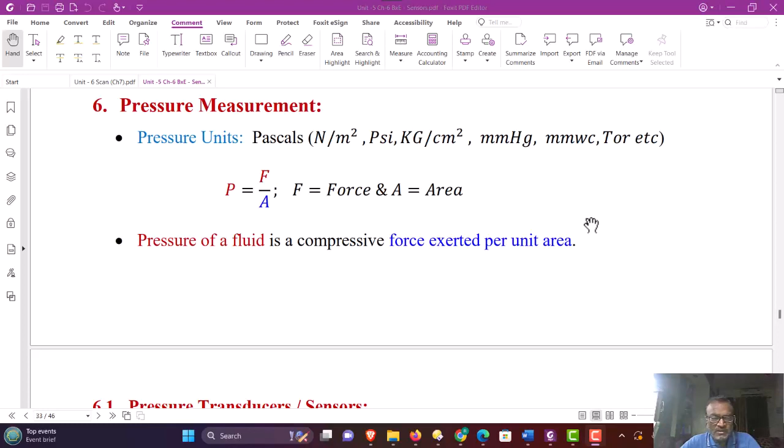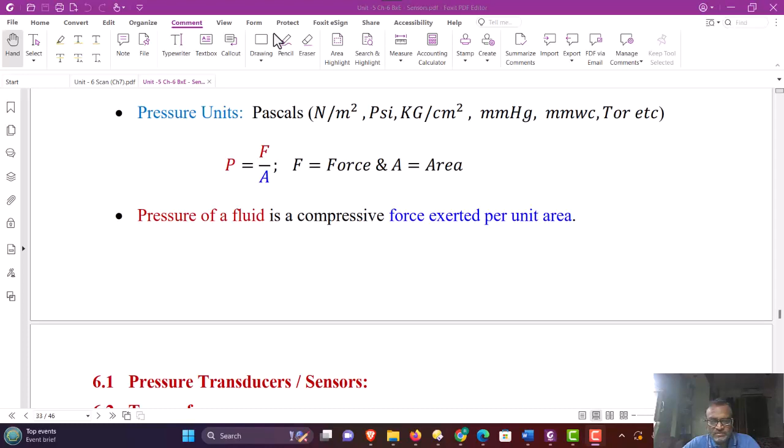This principle is used for measurement of pressure. Force is converted to pressure by applying it to a specific area, and force by area is giving you the pressure. Pressure of a fluid is basically a compressive force that is exerted per unit area.

The various pressure transducers used for measurement of pressure are listed here. Two basic types are used: gravitational pressure sensors, which measure the pressure against gravity.

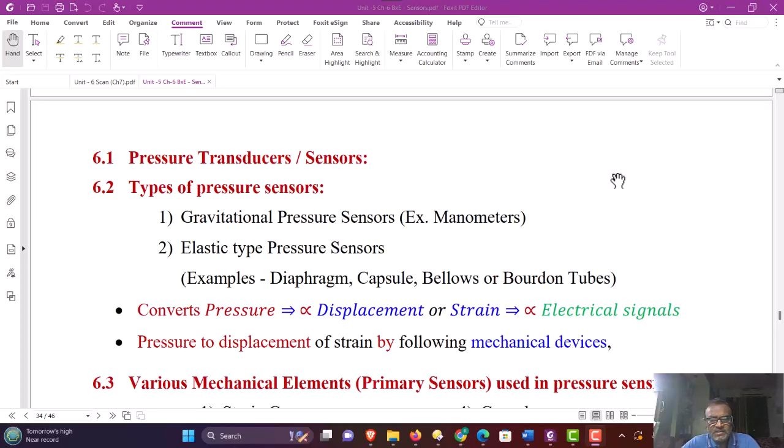Mostly the manometer comes in this range. Various types of manometers are there - water manometers, mercury manometers are very common. The fluid selected will be depending on the particular area of the application. But mercury manometers are very common and they measure the pressure directly in terms of mm of Hg.

The elastic type of pressure sensors mostly use elastic diaphragms, elastic capsules, bellows or Bourdon tubes. We will shortly see these mechanical devices and how they measure the pressure.

Basically, diaphragms, mechanical capsules, bellows and Bourdon tubes are the mechanical transduction devices. These are basically primary transduction devices. These devices transform the pressure into displacement, and displacement will be then converted to electrical signal by a secondary transducer. Many a time this can be done by using strain gauges or capacitive type of transducers.

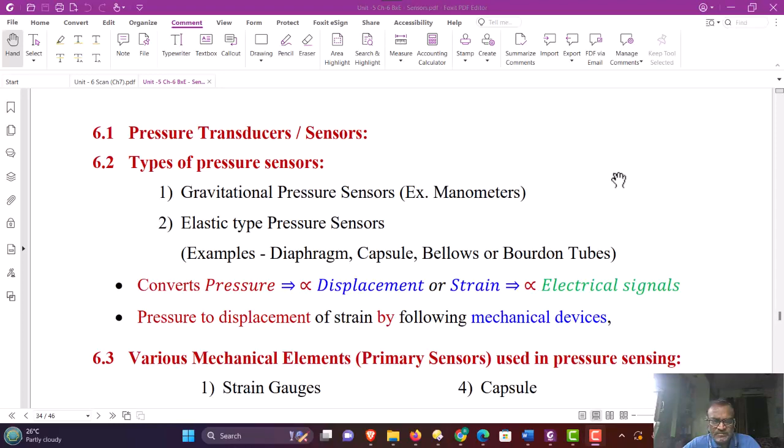The pressure to displacement conversion is done by these mechanical devices, and the displacement can be measured by using strain gauges very commonly. The strain gauges convert this mechanical strain to proportional resistance.

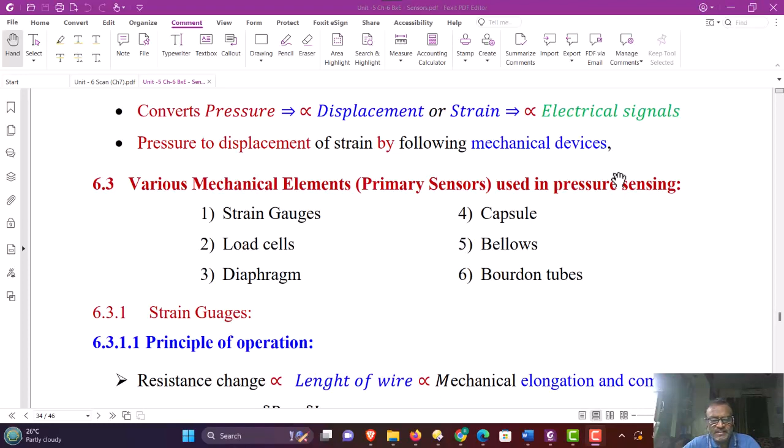Various types of mechanical elements, the primary sensors used in pressure sensing, are listed below: strain gauges, load cells, diaphragms, capsules, bellows and Bourdon tubes are quite common.

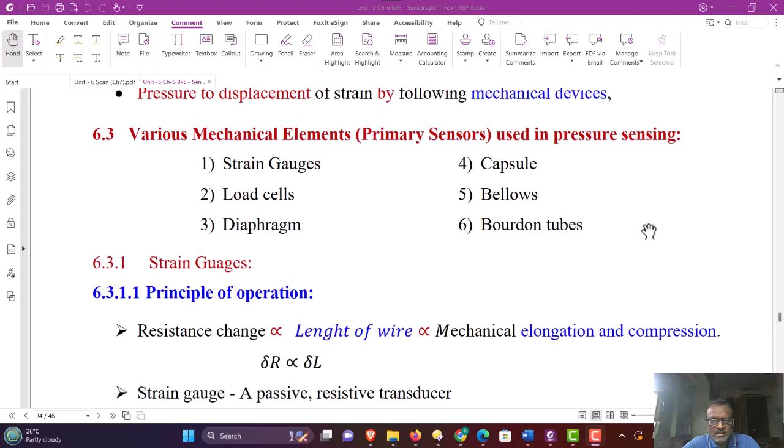Let us see what is strain gauge. The principle of operation of the strain gauge is when a strain is applied to a strain gauge, it changes the length. Strain gauge is basically a metallic wire.

When the strain is applied to the metallic wire, it elongates. When it elongates, the resistance of the wire will be changed. The change in resistance is proportional to the elongation.

This change in resistance is a passive quantity that will be further converted to electrical signal by using the Wheatstone Bridge type of circuits. Therefore, strain gauges convert the strain or mechanical displacement which creates the strain into proportional electrical signal. So we can conclude that change in resistance is proportional to change in length, that is shown here: Delta R is proportional to Delta L.

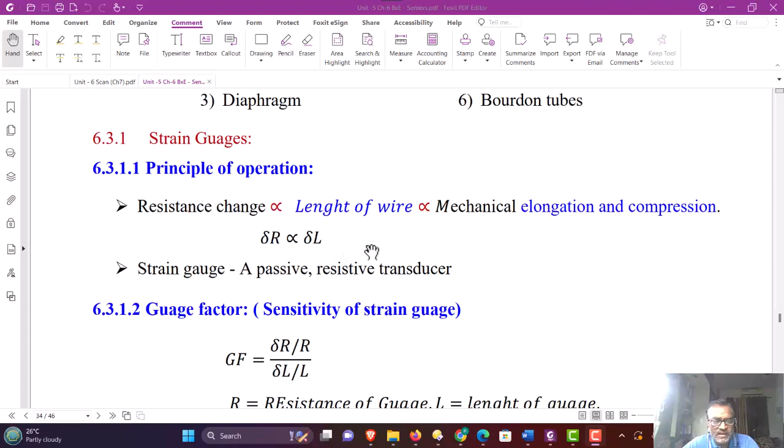Let us define some factor. It's called the gauge factor of the strain gauge. It is also called the sensitivity of the strain gauge, and it is defined as gauge factor GF is equal to Delta R by R upon Delta L by L, where R is the resistance of the gauge and L is the length of the gauge.

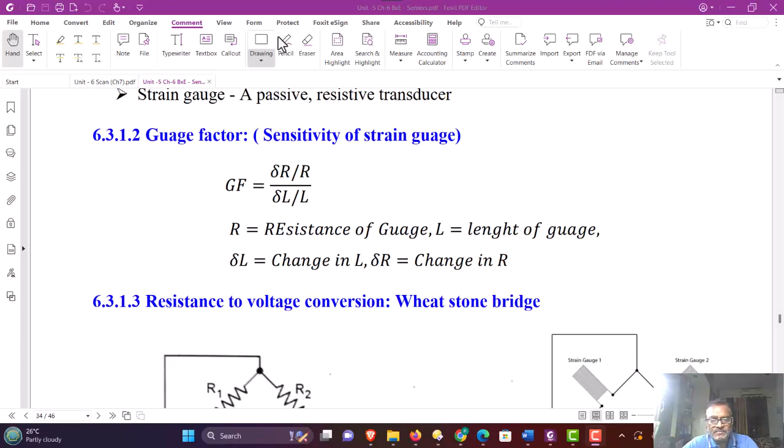Delta L is a change in length of the gauge due to applied strain, and Delta R is a corresponding change in resistance. Now, once the mechanical displacement or strain will be converted to resistance, then we can convert this change in resistance to the proportional voltage, and that can be done by using Wheatstone bridge.

The circuit shown here comprises four resistances. Out of that, one arm is constituted by a strain gauge. So R1, R2, R3 are the general resistances, and R4 is a strain gauge, and it is connected in a Wheatstone bridge form.

VDC is a biasing DC power source, and the detected output from the Wheatstone bridge is connected to the amplifier. The amplifier just provides the additional gain and high input impedance to avoid the loading of the sensing bridge. The output voltage of the amplifier is then proportional to change in resistance.

We will shortly see the analysis and calculate the output voltage. Here in the first figure, only a single strain gauge is shown, and that replaces arm 4. Whereas for higher sensitivity,

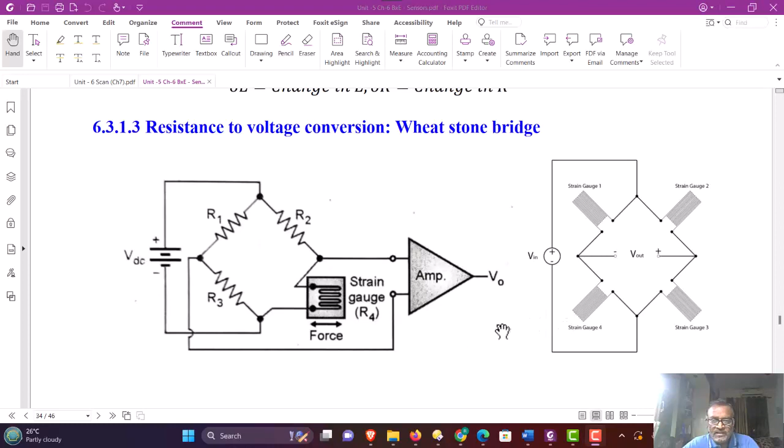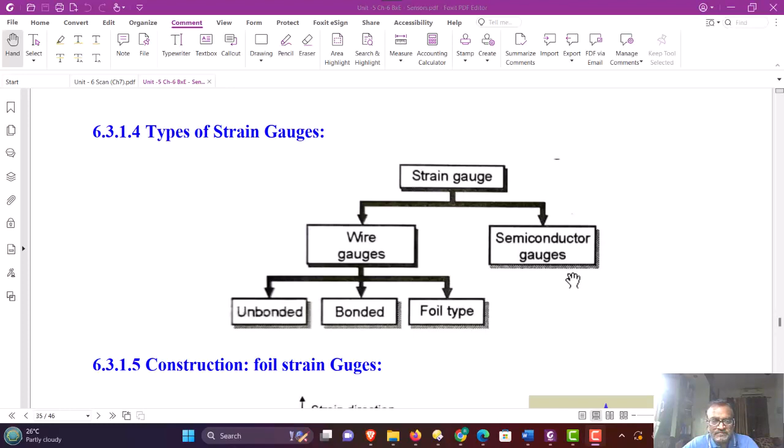The wire strain gauges are classified as unbonded, bonded, or foil type strain gauges. A typical construction of a foil strain gauge is shown in the figure. There is a base former, a flexible material, on which a very thin sheet of metal wire is printed either by screen printing or sputtering methods. This metallic zigzag wire structure is printed and shown here.

Here the gauge length is shown in the figure, and the direction of applied strain is also shown.

Whenever this gauge is applied with external strain or force, which will pull these wires, when these wires are pulled, their length will increase. When length increases, the diameter of the wire will reduce. And as we know, if the diameter of the metallic wire is reduced, the resistance of the wire will increase. Therefore, elongation of the strain gauge wire increases the resistance by an amount delta R, which is proportional to the applied strain.

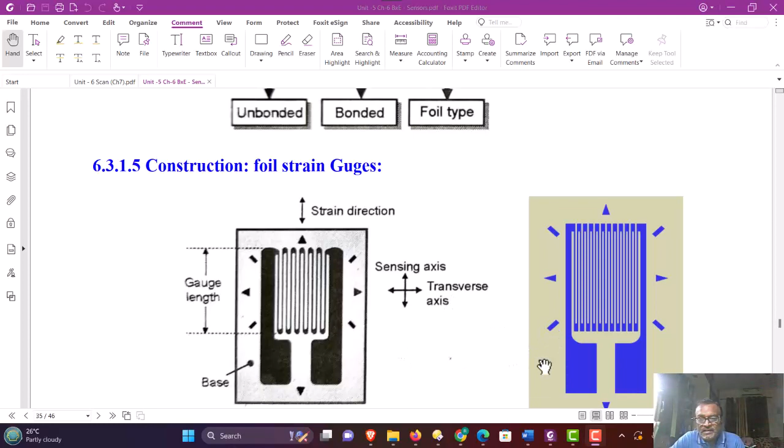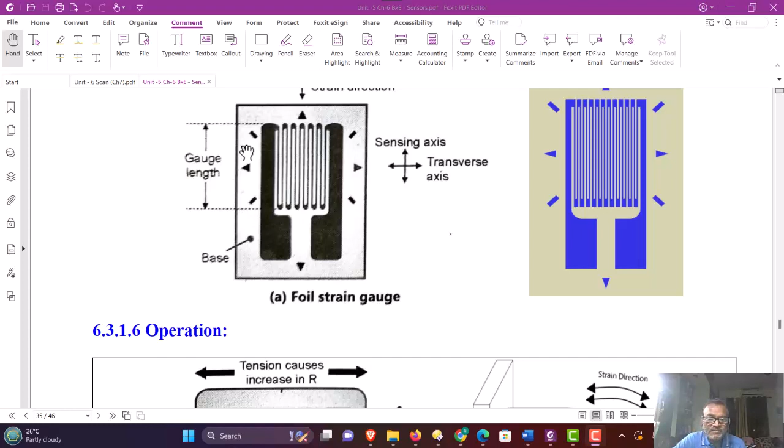The similar figure is repeated here in color form. Since these wires are very thin and printed on a flexible base, they are in the form of a foil, and therefore it is called a foil strain gauge.

Operation of the strain gauge, as I just explained, is shown again in this figure. The strain gauge is shown here horizontal. In the x direction, if we apply tension to this strain gauge, the wires get elongated and therefore there is a change in resistance. Whereas in the vertical direction, the gauge is insensitive to externally applied strain.

The external strain or force applied can be in the form of tension or compression. When it is a tensile force, the wire length increases and resistance increases. If it is a compressive force, the wire length reduces and therefore resistance decreases.

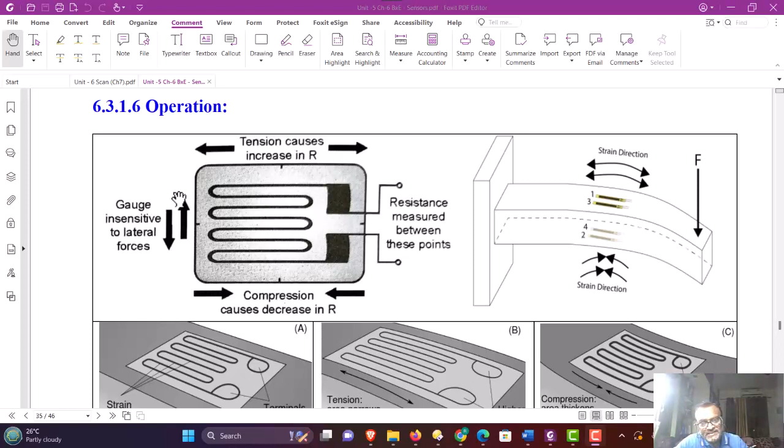This is shown here, how this strain gauge is mounted. It consists of a rigid support and a mechanical beam-like structure, and the strain gauges are mounted on the surface of this beam, say 1 and 3, and 2 and 4. There are 4 strain gauges mounted. You can have a single strain gauge, 2 strain gauges, or 4 strain gauges.

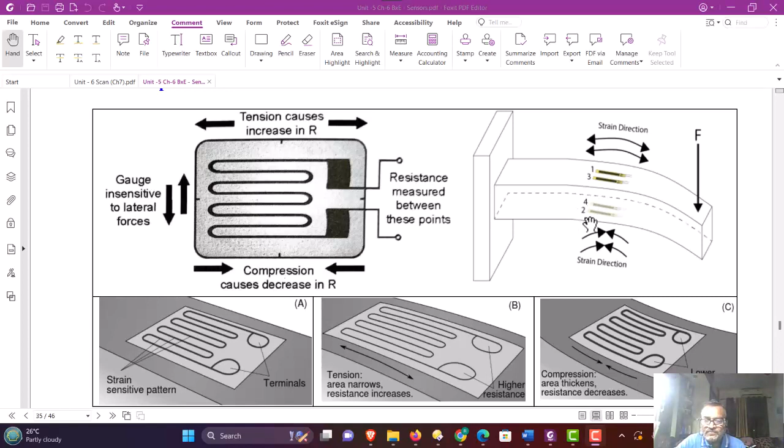Whenever force is applied to this cantilever beam, which is flexible enough, due to this pressure, stress is developed in these strain gauges. The upper strain gauges 1 and 3 gauge the tensile stress, whereas strain gauges 2 and 4 gauge the compressive stress. So the resistance of 1 and 3 proportionately increases with the pressure, and the resistance of 2 and 4 proportionately decreases with the applied pressure.

The same is shown in the figure below. The normal foil strain gauge is shown with terminal connections, and there is no deformation in the first figure A. When the foil is slightly bent, tension is created in the wires of the foil strain gauge and the resistance changes. In figure C, a compressive type of strain is developed due to bending of the strain gauge to the inner side.

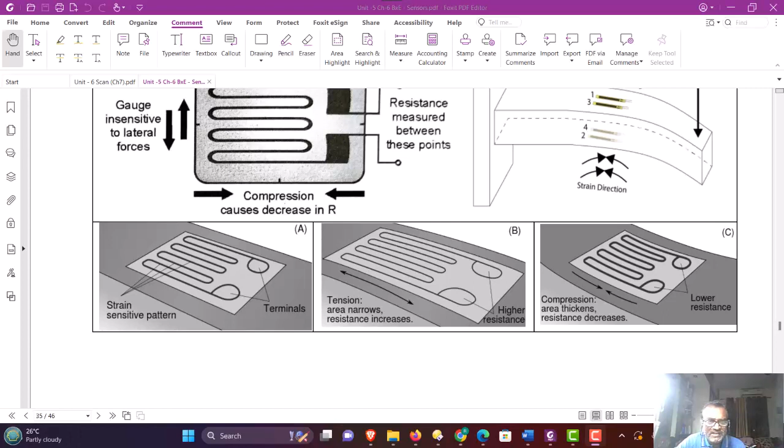The same happens here on the cantilever beam. Additional figures are shown for better understanding.

So now we get from the strain gauge: the pressure is converted to a proportional change in resistance. If these strain gauges are connected in bridge form in the appropriate branch, then the bridge output is proportional to the change in resistance.

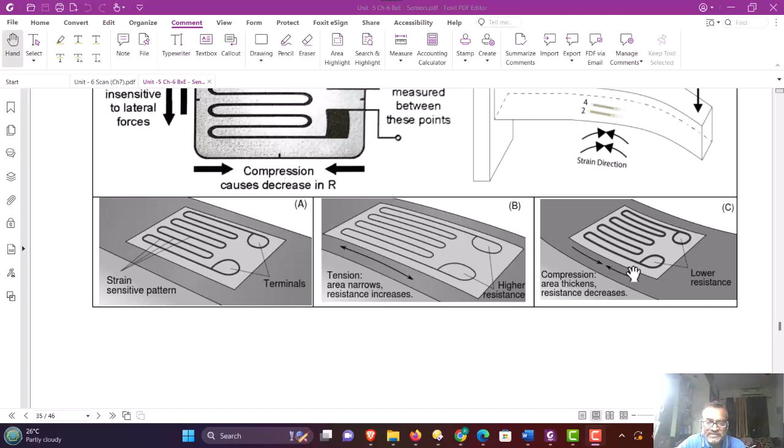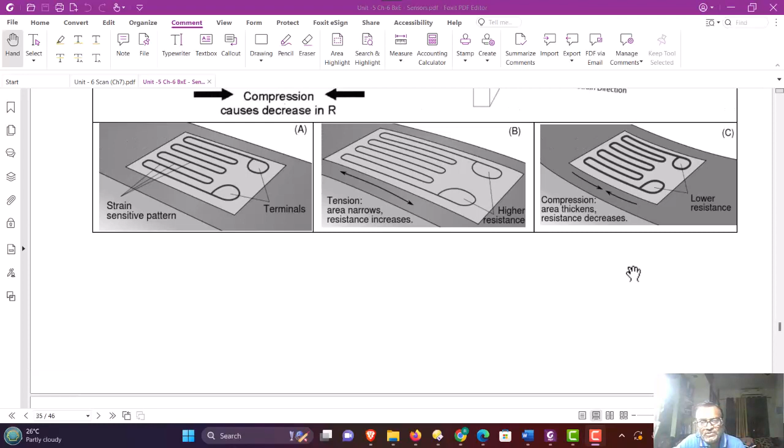If four strain gauges are used and connected appropriately in the cross arms, then the sensitivity of the bridge increases four times compared to a single-arm strain gauge connection. That's why, to have larger sensitivity of measurement, normally four strain gauges are used in the four arms of the Wheatstone bridge.

Various advantages and disadvantages of semiconductor strain gauges: advantages are that semiconductor strain gauges have a larger delta R compared to metal alloy gauges, meaning they have a higher gauge factor. They are chemically inert, or can be manufactured with chemical inertness. They are smaller in size compared to wire or metallic strain gauges.

Various limitations of semiconductor strain gauges: they have poor linearity, they are more expensive, and they are sensitive to temperature because semiconductor devices have temperature-dependent performance. Therefore, semiconductor strain gauges are normally used where the temperature does not vary widely. They have higher sensitivity.

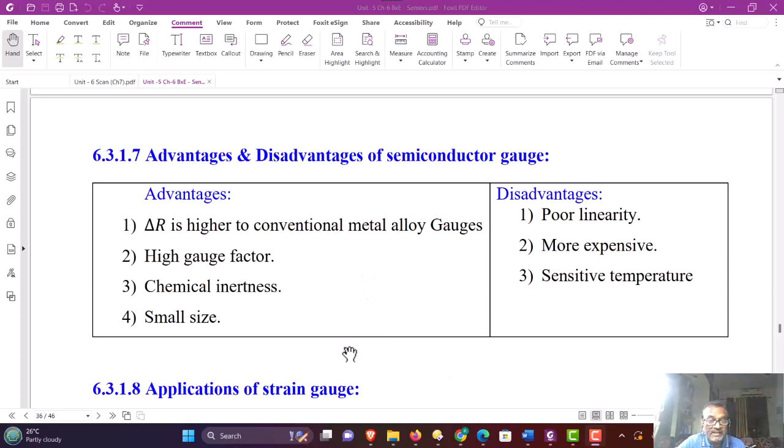Applications of the strain gauges: strain gauges are normally employed for measurement of pressure, measurement of weight, and measurement of level. We have seen a very common application in weight measurement and electronic weighing systems at various places and shops, and at a large scale, truckload measurement using weighing bridges.

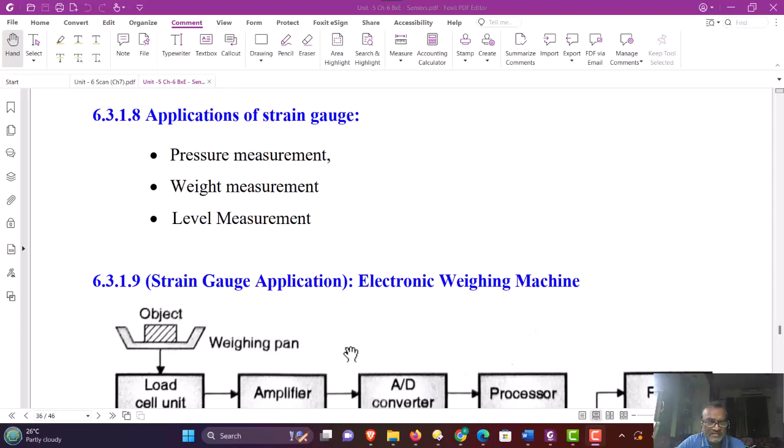A typical application of the strain gauge is the electronic weighing machine. A block diagram of the weighing machine is shown here.

It consists of a load cell. A load cell is basically a mechanical structure, and on this load cell the strain gauges are stuck or pasted. When the object is placed on the load cell, it exerts pressure on the load cell, which causes deformation of the mechanical structure inside, and that creates the compressive strain.

Whereas if four strain gauges are used, one set of strain gauges gets elongation and another set gets compression, and therefore there is a change of resistance between the various strain gauges.

The output of the load cell is basically a change in resistance. This change in resistance can be converted to an electrical signal by using a Wheatstone bridge. Majority of the time, the load cell unit itself includes the Wheatstone bridge, so the practical load cell available in the market can directly provide output in terms of voltage, which is proportional to the weight of the object.

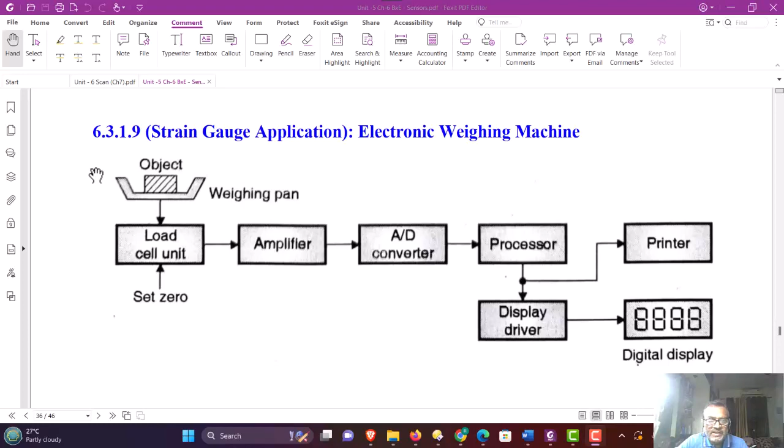When pressure is applied, there is a deformation of this steel bar that is very small, in fraction of a micron. Due to this deformation, there will be strain developed in the strain gauges, and therefore there is a change in resistance. This change in resistance is very small, in the range of a few milliohms, and this change can be converted to electrical voltage by the Wheatstone bridge.

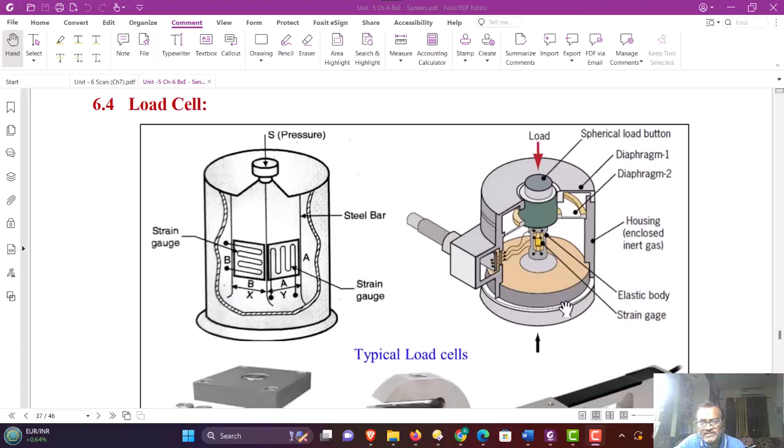This another figure also shows the internal structure of a practical load cell. You will see here there is a load cell column to which the pressure is applied, and this elastic load cell is basically a structure of metal to which the strain gauges are pasted, and these strain gauges are connected by wire to external terminals.

The cross section view is shown here. From outside, this can look physically like this. In this first figure, this horizontal bar is basically a load cell, and the strain gauges are attached to this horizontal bar, one from the top side and another from the bottom side. This is a cantilever type of strain gauge, whereas in the first two figures the column type of strain gauges are shown.

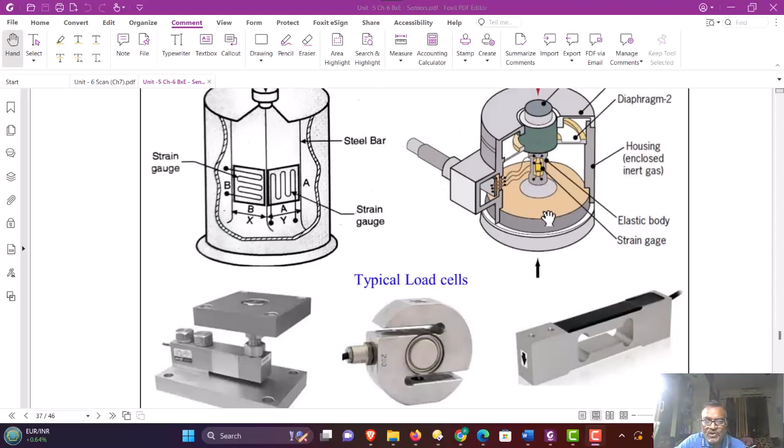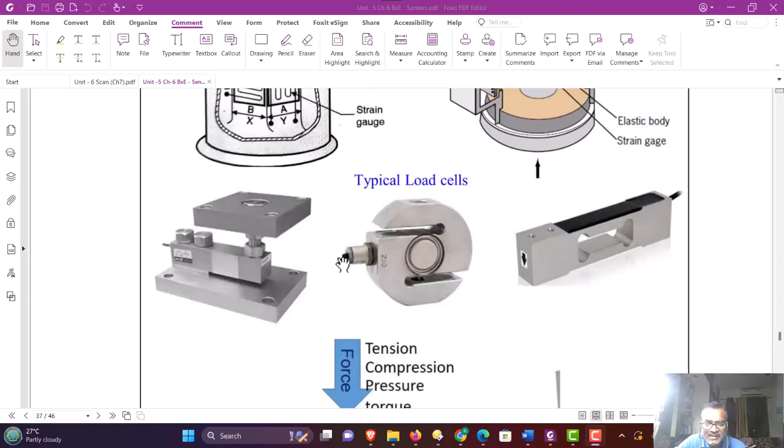Here another shape of strain gauge is shown. The pressure is applied from the top side and there will be development of strain. So the strain gauges can be pasted here, in these slots. One is here and another is here, and these strain gauge terminals are taken out, and these wires can be used further for connection in the bridge form.

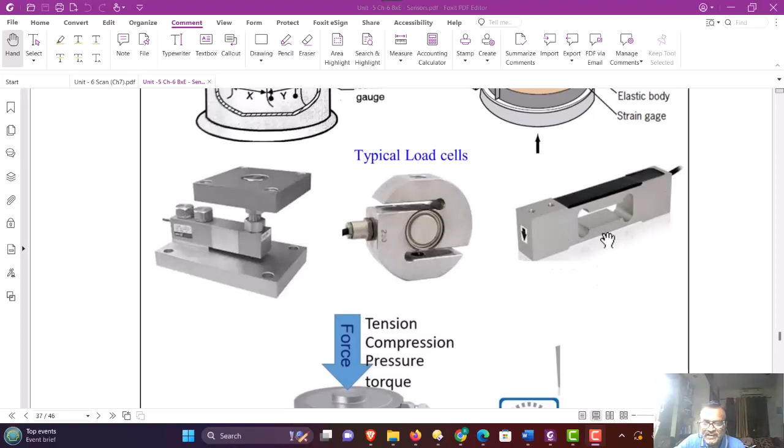Another structure is shown here. Whenever pressure is applied here, there is a deformation of this slot, so in this slot the strain gauges are pasted—one from the bottom side of this top edge, and another shown here on this portion. So when strain is applied, there is a change in resistance of the strain gauge, and these strain gauge wires are connected and available for external connection via wires.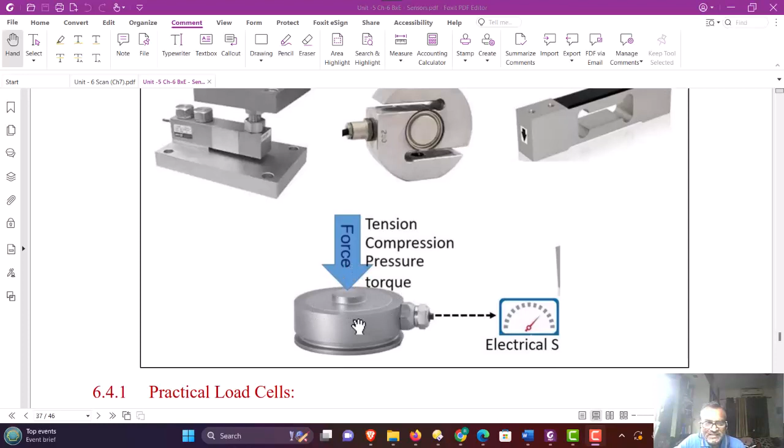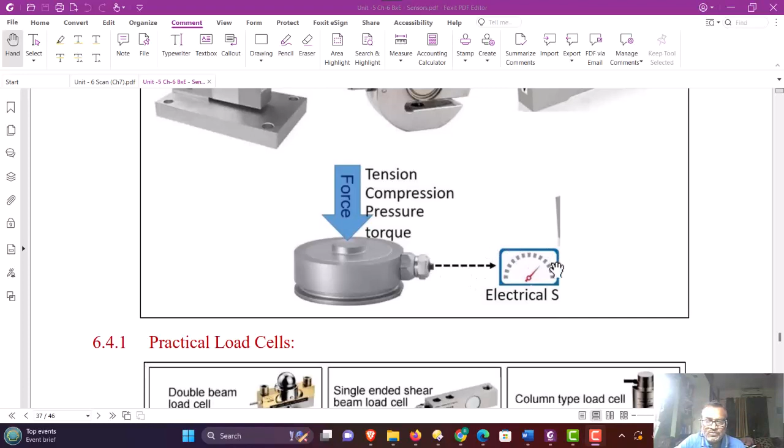Another type of load cell is shown that is totally hermetically sealed inside. This is the column, this strain gauge shown here. The internal cross-sectional view is shown in figure 2 or figure 1. Outside, it looks like this. So when pressure is applied, the strain gauges are actually inside this assembly. The output available from the strain gauge can be connected to the electrical system for display purposes.

Various types of practical load cells are shown in this figure. That's all about the strain gauges, friend.